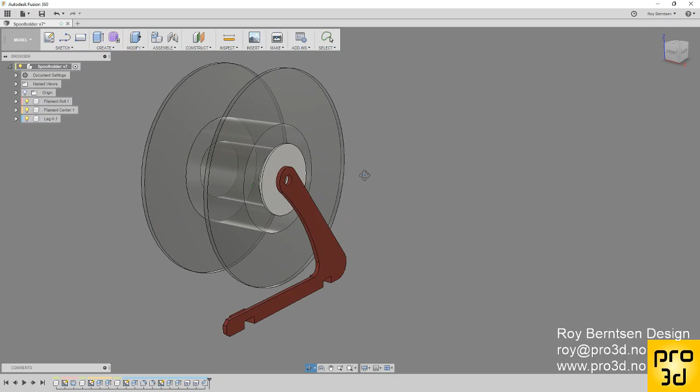Before we start designing, let's make sure these guys stay in place, and we need to ground something. So let's just ground the leg. Right click and make ground, and then we want to assemble. So go assemble, as built joint.

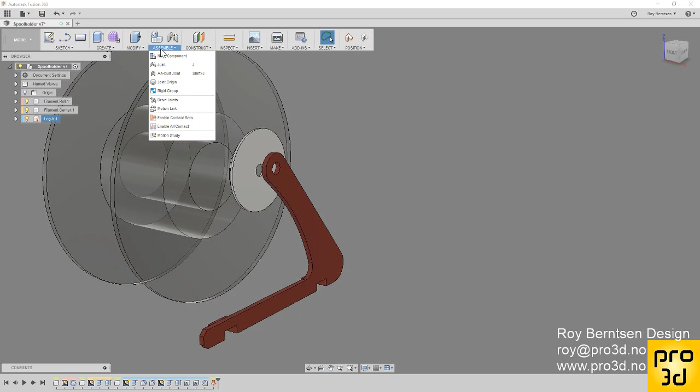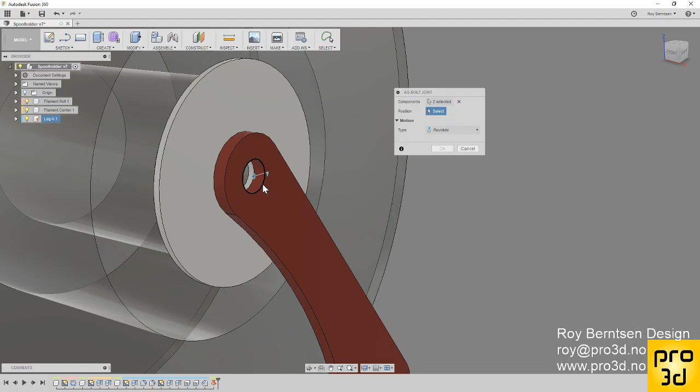Just continue. If you moved it, click the filament center, the center cup, and the leg, and we want to do that revolute. It asks for position, so select this edge so it can spin. And then one more, assemble as built joint, the spool and the center cup. It should be rigid.

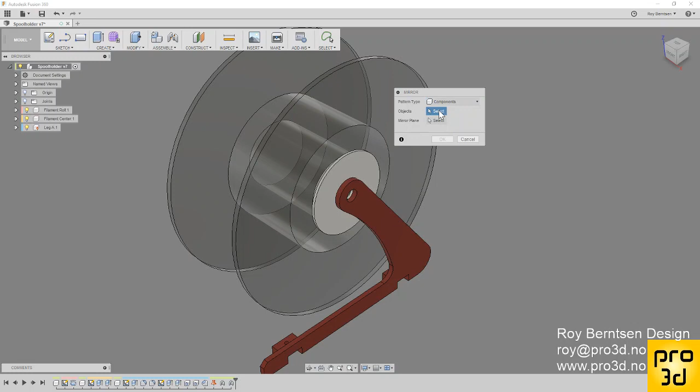Okay, then we can flip the leg and the center cup. So go create and make a mirror, and we now need to change the pattern type to components. For objects, we pick the center cup and the leg and go select mirror plane, pick this plane and go OK.

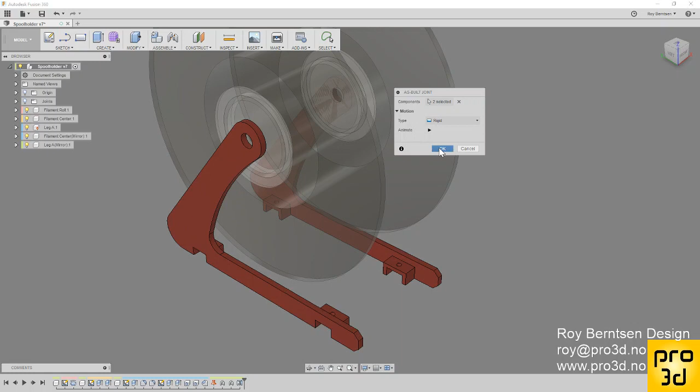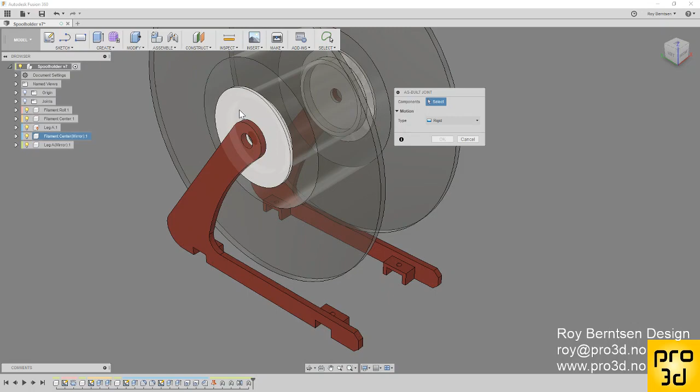So on the other side now we need to fix these guys. So that's another assemble as built joint. Pick the new leg and the old leg, make it rigid, click OK, hit J on the keyboard and pick the new center. Back to assemble as built joint. It's supposed to be Shift J. As built joint, and this center cup and the spool, make it rigid, then OK.

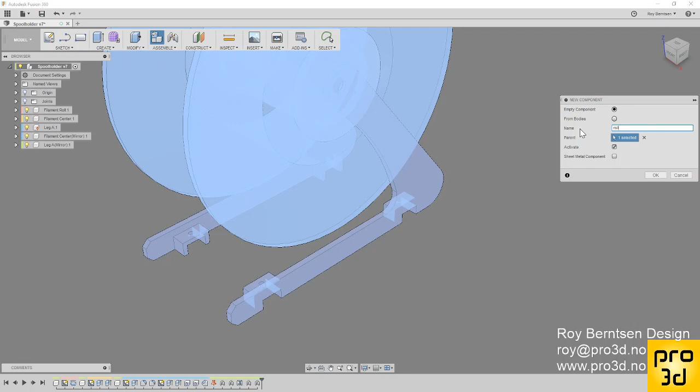So now we can start designing some rails that go on the bottom here. So let's make a new component. Call it rail A or something, just rail or whatever you prefer. And we want to create a sketch, and we want to do that on the center plane. That's kind of important right now.

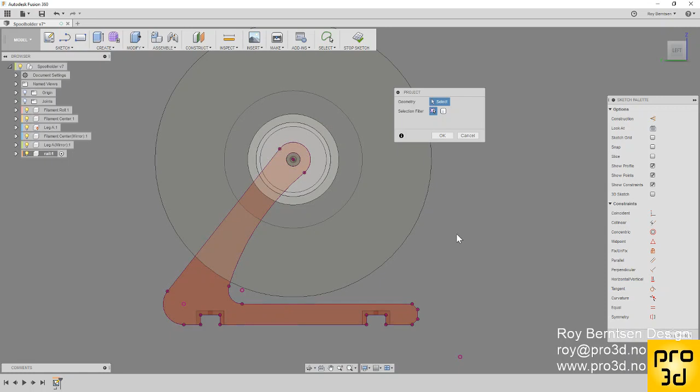Pick the center plane and hit P on the keyboard for project, then click one of the legs and hit OK. And we want to do an offset, so go sketch, find offset, uncheck the chain selection, click these three lines and make them inside, so 0.25 inside. I need to do a minus 0.25.

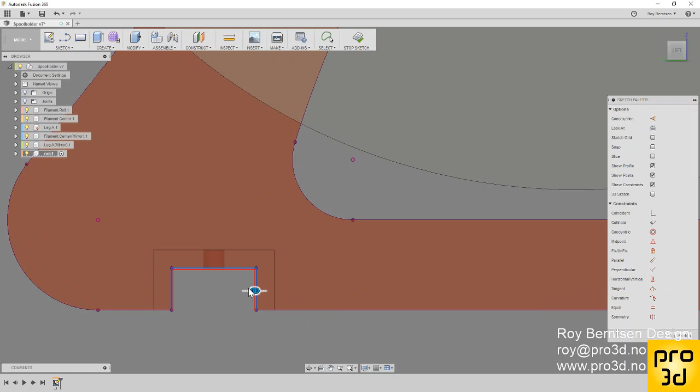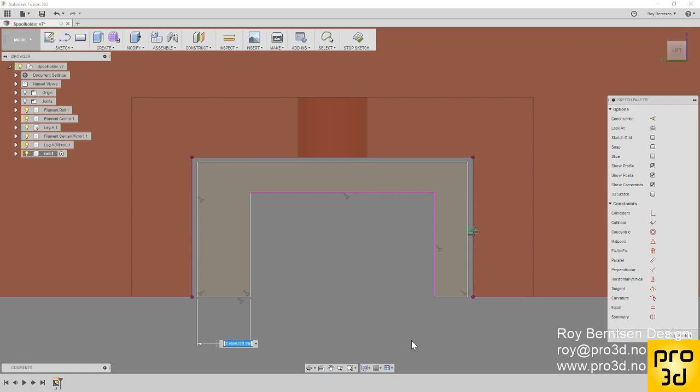And hit L on the keyboard for line and just draw something inside here like this. Just copy my sketch. Hit D on the keyboard for dimension and do a 2 mm gap here. The same over here. Just click the first dimension and in one of the top corners at the side, 2 mm. That is fine.

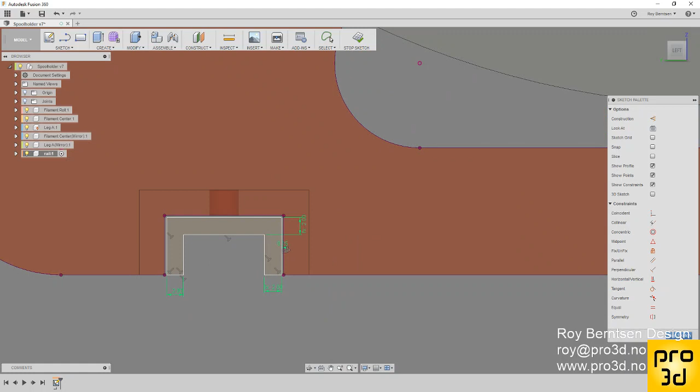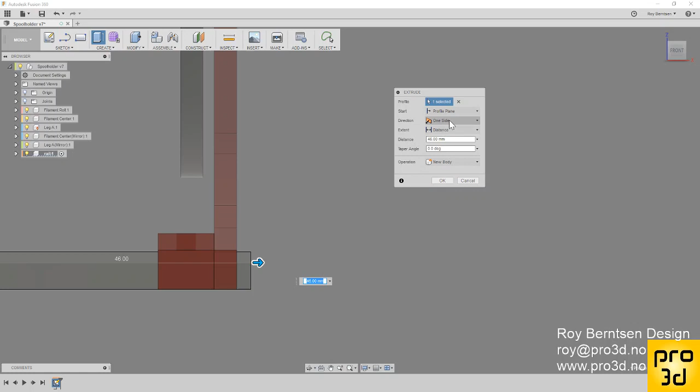So return home. Oh, and do an extrude. Pick the profile, extrude it out so it's outside the leg. 50 is more than enough. Let's just do, I think 46 is fine, and make it symmetric. Okay.

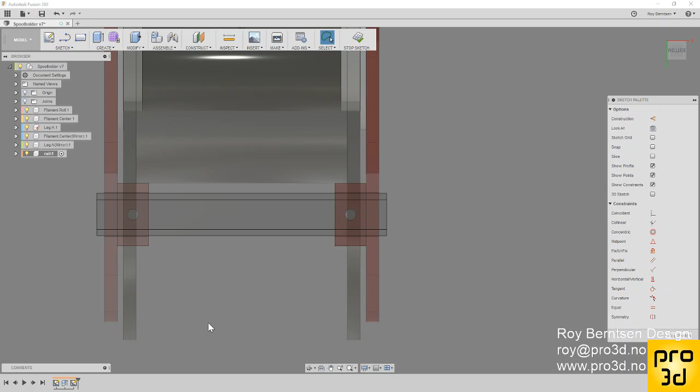And I want you to make some holes in it. So click this plane and hit create sketch, do a P on the keyboard, click the same plane again, and click the holes. To get to the holes, just click and hold, and you get a selection filter, make it edge, and hit OK, and do a line, a center line.

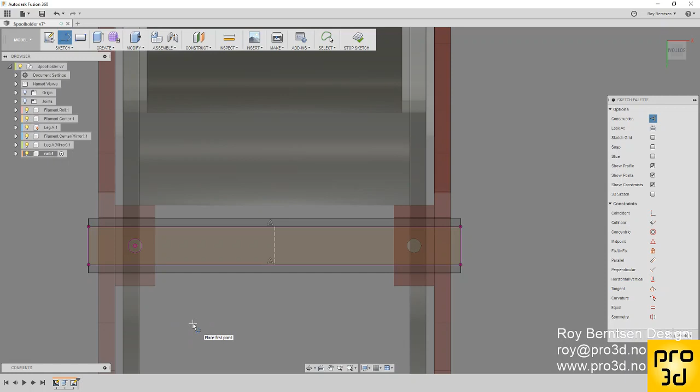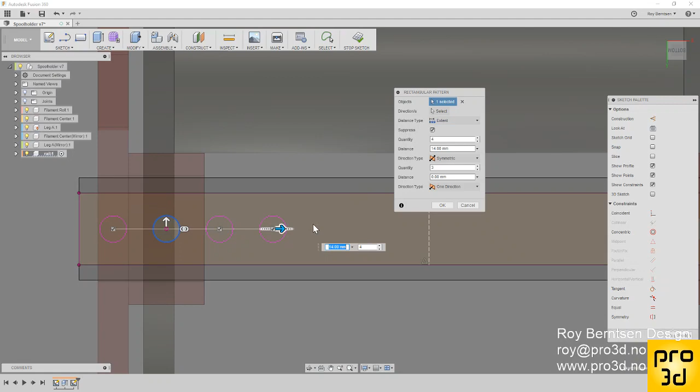So L for line, hit X for construction line, and find the center. You see this triangle, then you have the center. Just make a center line like this, and we need to make a rectangular pattern. So select the circle. Let's do it 4, and let's do it symmetric, and let's do it 14 millimeter. Okay, stop sketch and make an E for extrude.

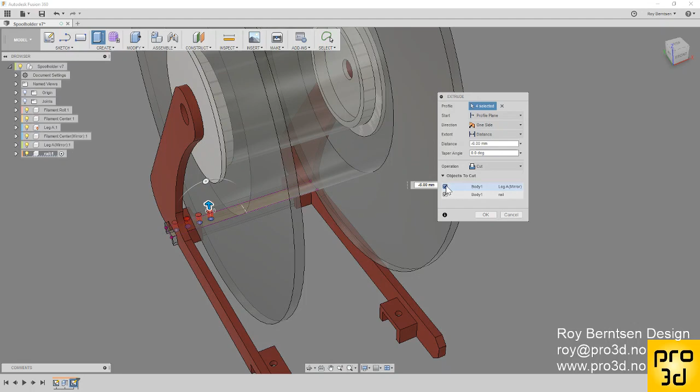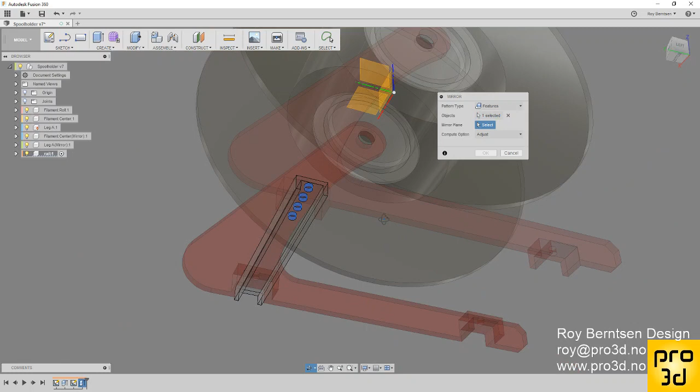Hit key E on the keyboard, pick the four circle profiles, and make sure in objects to cut, unselect leg. Okay, then we can mirror this over to the other side. So go create, mirror, and change to features. Go select in the timeline the last extrude and select the mirror plane, this guy, and hit OK.

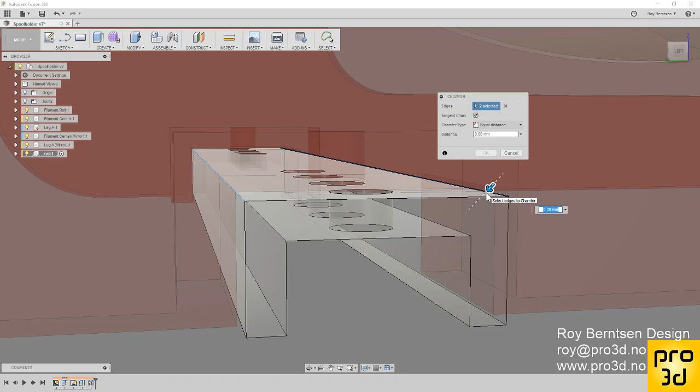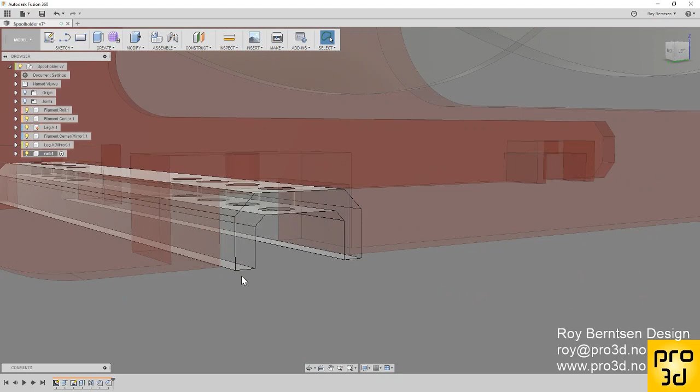Let's make some chamfers on this guy. Go modify, chamfer outside, 2. Let's do one inside as well. Go modify chamfer, pick this and do it at 1. Let's do one on the corners as well. Chamfer, and make those 2 as well.

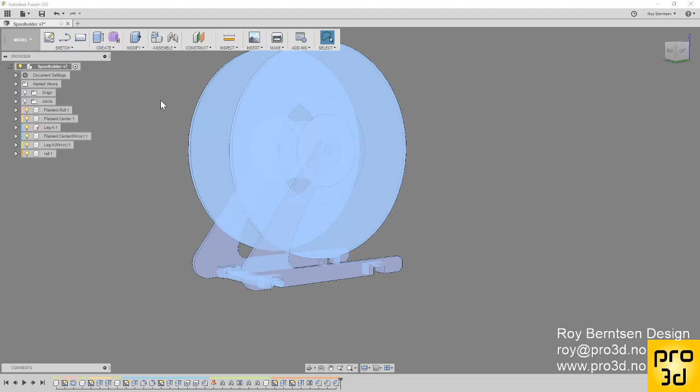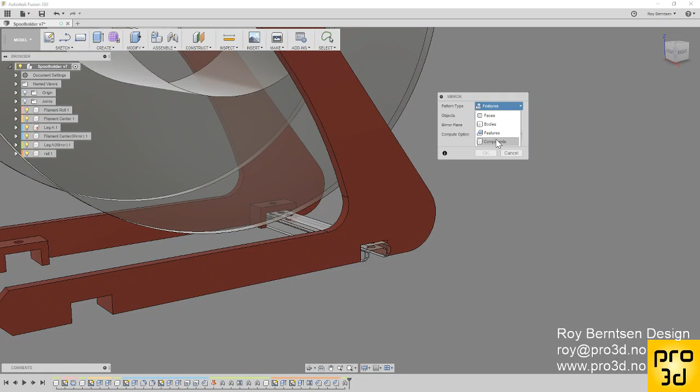And go to the top, activate the top level, and we want to assemble it as built. Click the rail and the leg, make it rigid, hit OK, go create mirror and change to components, click the rail, hit select, pick the mid plane.

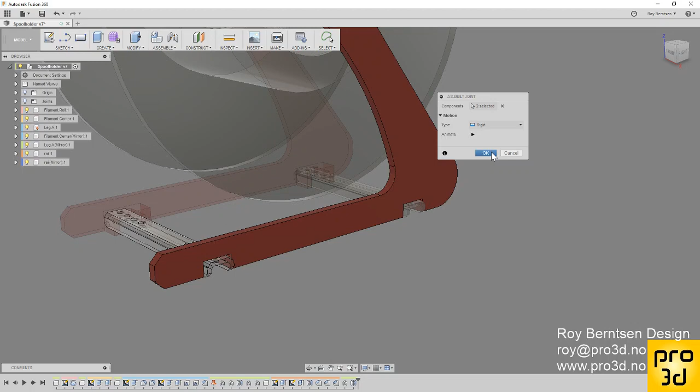This mid plane now, not that one, and there you go, and do a last as built joint, the last rail and the leg, hit OK, and there you go. And let's just put some colors on the rail. Let's put blue on the rail, or color of your choice.

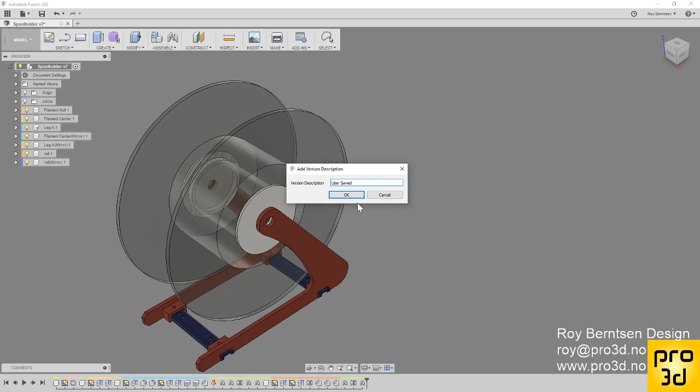So I think that is long enough for this part, so let's just finish the whole spool holder in the next and final video of this series.